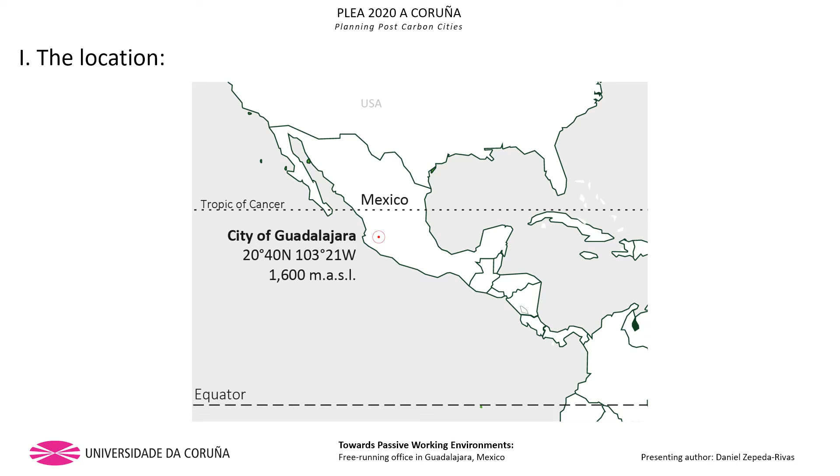The location of the work is the city of Guadalajara, Mexico, located in the tropical northern hemisphere, 1600 meters above the sea level. The location has an average yearly temperature of 18 degrees, with temperatures ranging between 35 and 0 degrees. The main cause of discomfort is overheating and therefore the excessive use of air conditioning during the year. Undercooling is not a problem because temperatures during the winter often exceed 20 degrees.

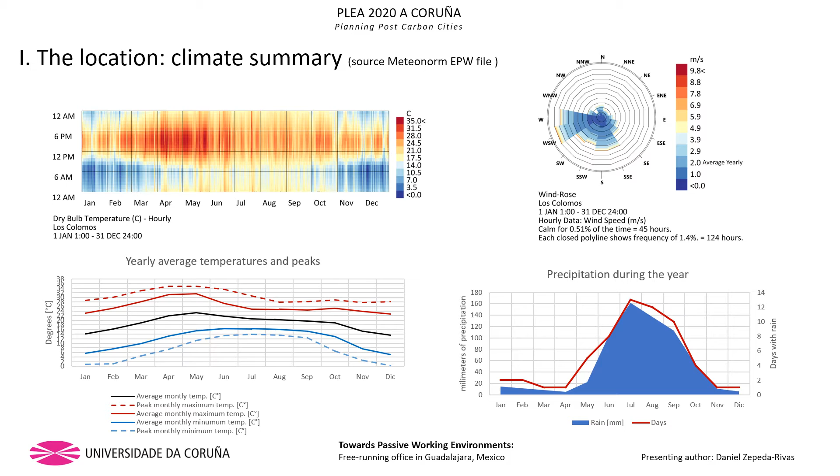The wind presence is almost permanent since the yearly average speed is 2 meters per second and there are only 45 hours without wind presence during the year. Rain is also copious and frequent during the year. A theoretical climate potential study shows that given the climate conditions of the location, passive strategies are efficient and possible. The most efficient are passive solar heating for the colder months, thermal mass for thermal storage during the year, and natural ventilation and night cooling for the warmest seasons.

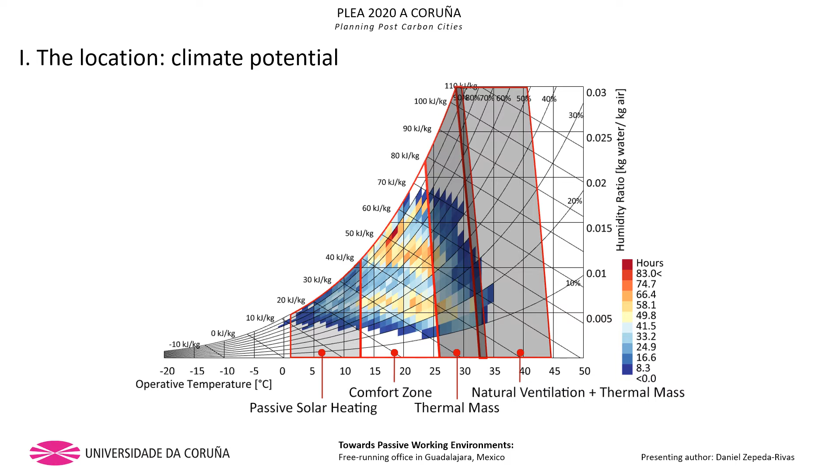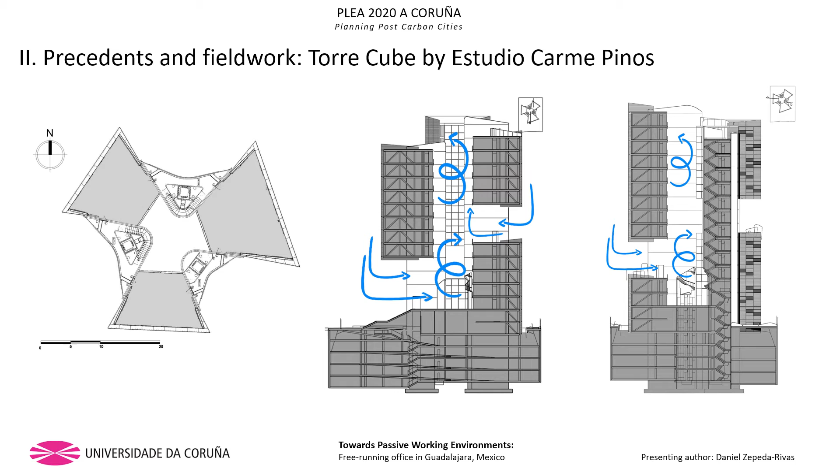As a precedent, a free-running building designed by Estudio Carme Pinos was considered. It was designed considering the application of passive strategies as well as an enhanced natural ventilation system. It is already built and inhabited in the city where the research is developed. The dimensioning, orientation, materials, and morphology of the building were carefully designed with the objective of enhancing passive cooling strategies and the availability of adaptive opportunities. The identified strategies were solar protection visible in the double skin facade, thermal mass visible in the thick concrete walls, and enhanced natural ventilation with the possibility of cross ventilation and night cooling.

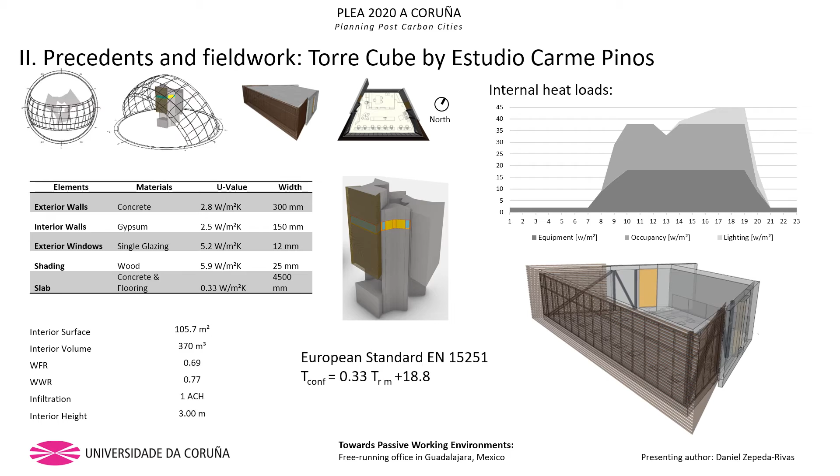In order to obtain a better understanding of the performance of the building, a digital building model was elaborated, recreating the internal and external conditions. The materials, resistance values, and internal gains were modeled, and a series of simulation runs were elaborated. The European standard EN 15251 was utilized to assess the environmental quality of the building interior conditions. The results of the simulations show that the building is capable of creating comfortable spaces according to the European standards, mainly as a result of the combination of passive strategies under these specific climate conditions.

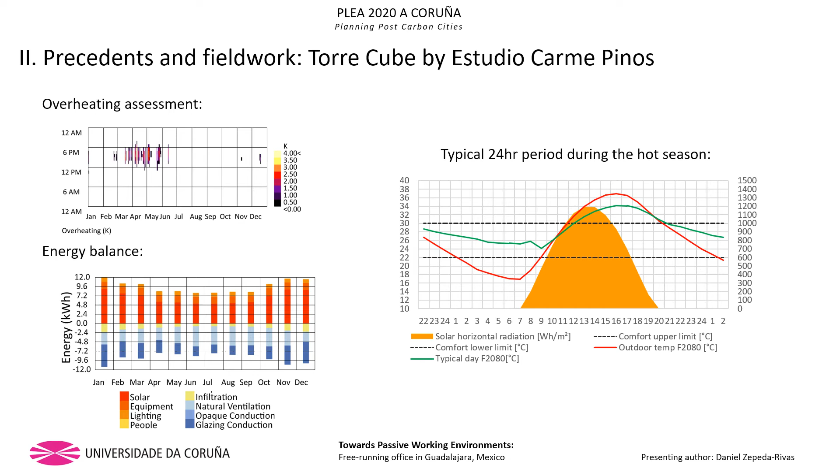The overheating analysis showed that the interior conditions were never 3 degrees above the comfort limit and it never exceeded 3% of the occupancy time. The energy balance analysis showed that the shading device blocked most of the incoming radiation. Meanwhile, the thermal mass and the glazing area allowed to capture the night coolness and slowly release it during the day. Nevertheless, the original research question prevails. Why does the building work so well? Which is the most efficient passive strategy?

With the objective of discovering that, a series of simulations were performed modifying 5 different variables. As a first step, 5 different alternatives of solar protection were tested, progressively changing. Then 3 different types of walls were tested, including a high thermal mass option with a concrete wall of 30 centimeters, a low thermal mass option of concrete of 15 centimeters, and an option of high thermal mass with 16 centimeters of insulation. Additionally, different interior heights of 2.7, 3, and 3.3 meters were tested together with 4 different options of window-to-wall ratio with single glazing and double glazing options. At the end, 360 simulations were performed.

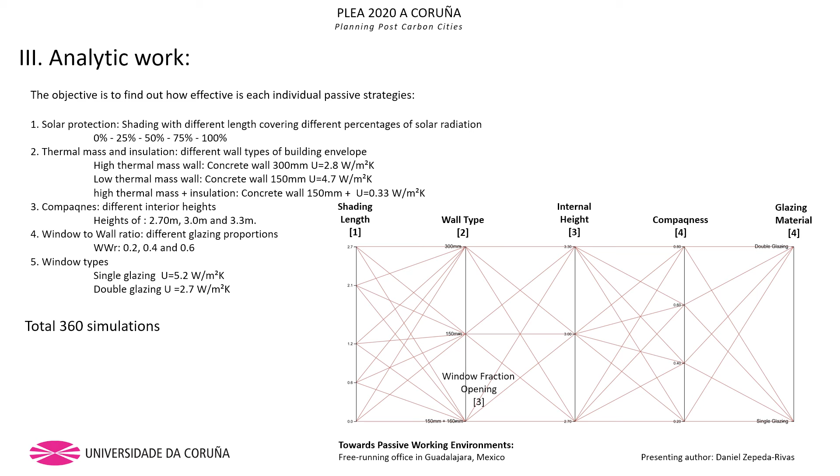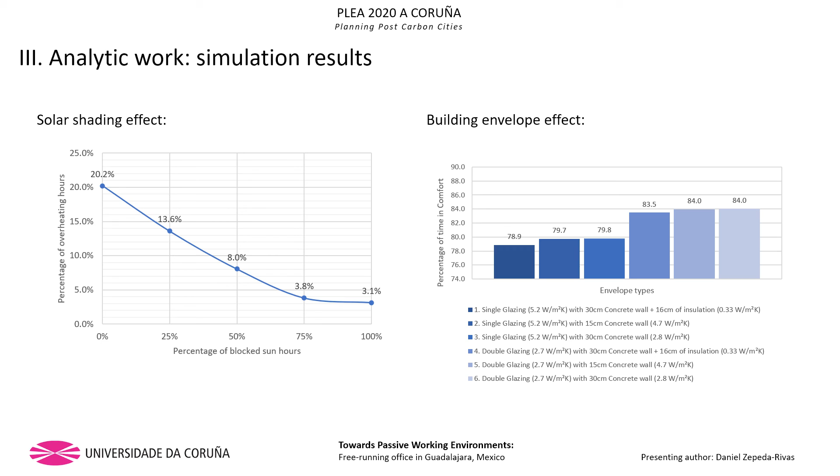After that, it was discovered that the passive strategy with the greatest influence is the solar protection, with the possibility of reducing the yearly overheating hours from 20 to 3%. The glazing material showed a greater influence than the wall composition, although the improvement with the glazing was only around 5%. Meanwhile, the wall types was only 1% regarding the percentage of time in comfort. Moreover, assuming the absence of solar protection, when testing the influence of the window-to-wall ratio and the interior height, the increase of the interior height did not show a significant improvement. There was only an improvement of around 3% when raising the interior height 60 centimeters. Meanwhile, a decrease of the glazing ratio showed a significant improvement, achieving 95.7% of time in comfort with a window-to-wall ratio of 0.2.

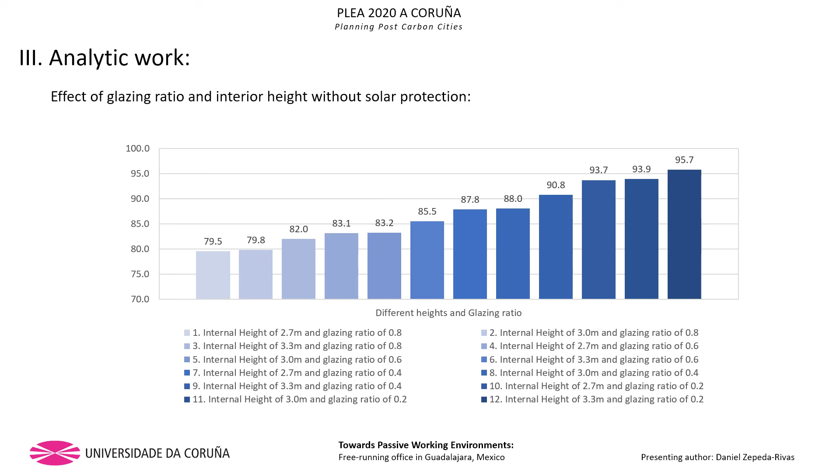Conclusions: this study identified solar protection as the most efficient and effective passive strategy for naturally ventilated office buildings at the location. The application of a shading device allows the possibility of increasing the glazing ratio until desired daylight levels are reached. Another advantage of the consideration of a solar protection is the possibility of more window opening areas for natural ventilation. When the solar protection is omitted, the best performance is achieved with a high resistant envelope with a combination of thermal mass and insulation together with a low glazing ratio.